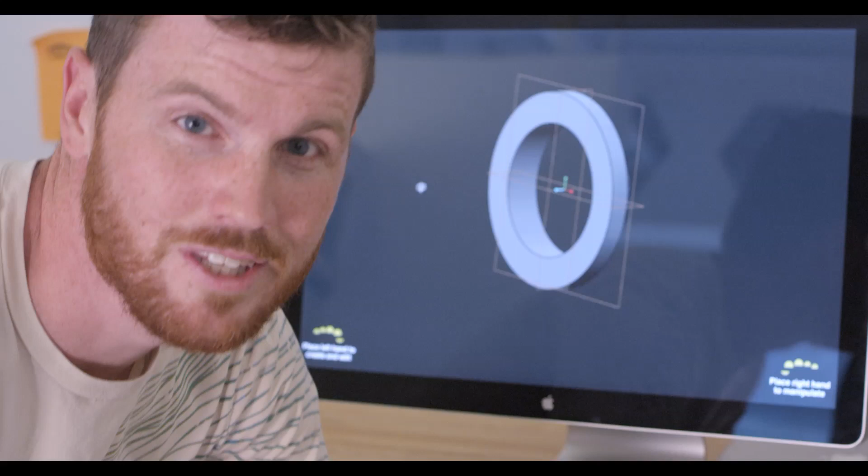We have a problem. As I see it, the creative tools I use every day are antiquated. They were designed 10 years ago and nothing's really changed. But unless you haven't noticed, the world has changed. We have crazy things called touchscreens. We have voice input. We have in-air gesture. And the one that I'm most excited about right now is the Leap.

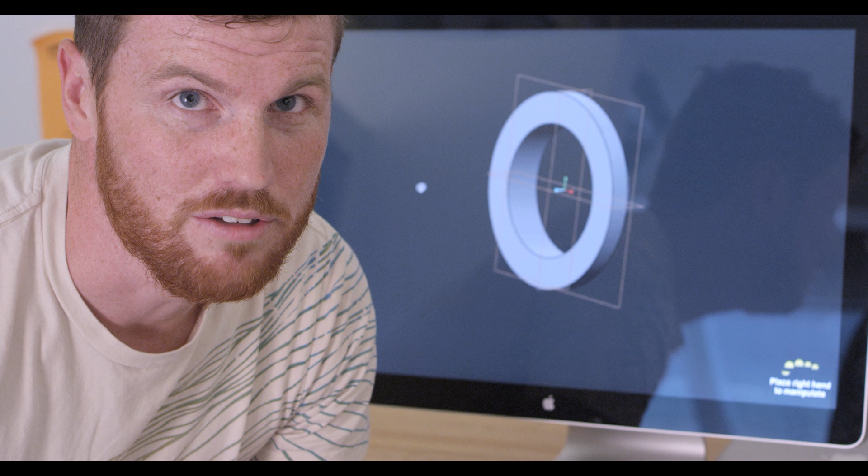So I'm going to walk you through what we call a Wizard of Oz prototype. And this is a prototype. It's not real working code yet. It would be if we could get a Leap device, but we don't have one yet. Okay, so the first thing you'll notice here are these little menus to the left and right. Now these we call self-revealing gestures.

Here, if I put my hand in here, you'll notice it shows me that it can recognize my 5 fingers actually, and it tells me what each of my fingers are for. And then I put my hand out, it tells me, oh, you should put your hand back in. Alright, so I do, and you'll notice it can recognize even my thumb down here. The Leap is awesome at that type of interaction.

So now it's prompting me to connect these 2 fingers together. So if I do that, tell me the next thing. Ask me what I'd like to create. If this wasn't the Wizard of Oz prototype, I wouldn't be talking right now. I'd be telling it what to do. If I wait a little longer, it'll teach me about what the system can do. So I want to learn about extrusions. Make a chamfer.

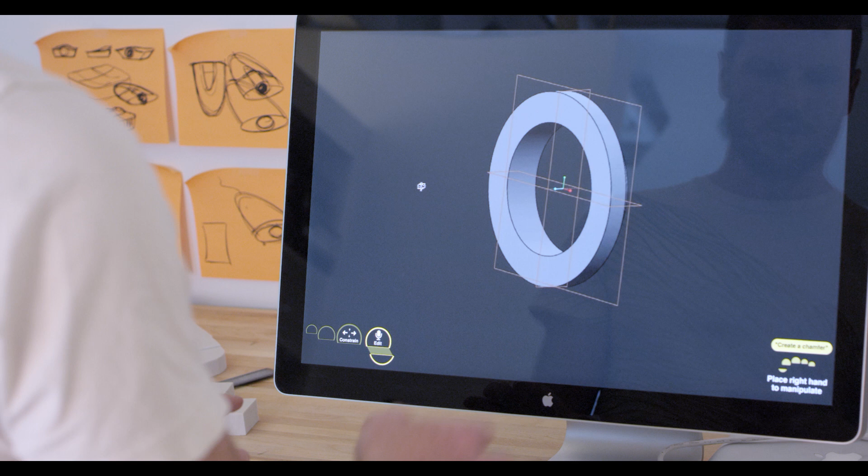So the novice user will just kind of read the menus. The expert user will learn what they're supposed to say and do and just do it. Their muscle memory and their vocal memory will kick in. So now you'll notice my create a chamfer, which is like a beveled edge, went over to my right hand. So if I put my right hand in, it'll say select the edge you want to chamfer.

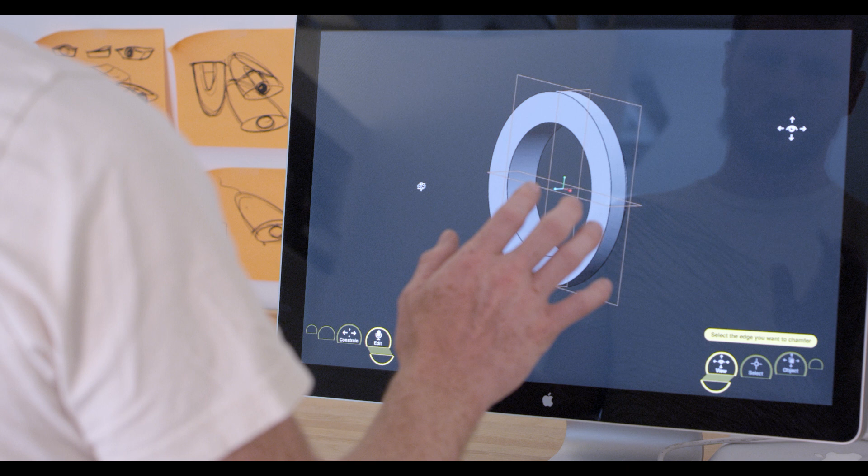And here you'll notice on the screen maybe that they put a cursor up there. So that cursor is mapped to arm movement. So my whole hand's movement will affect the cursor. And if I pinch my first finger together, I can activate view. I can move it around, see the 3D model, and my first finger is view because you do that all the time in these 3D modeling programs. You want to see the view, move it around.

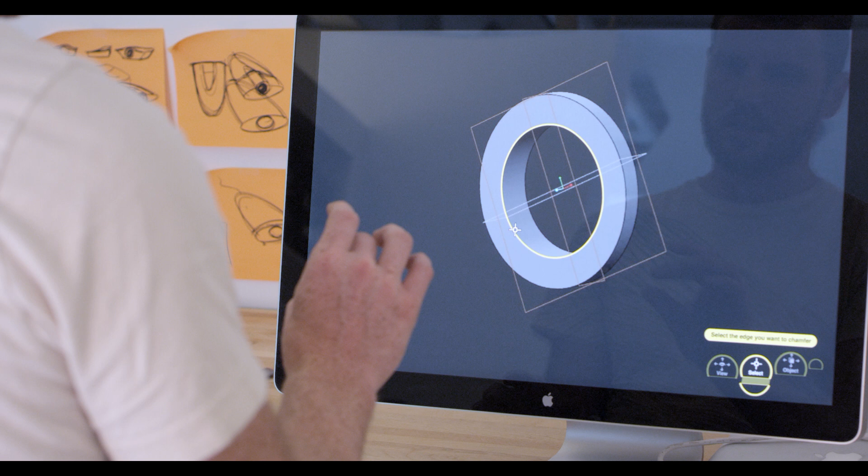Second finger is select. So I can move my arm and I can touch my second finger to my thumb. When I see what I want to select, there it is, that's the edge. So now I've made a chamfer. Awesome. And now it's saying edit the amount of chamfer. So here I'm going to zoom in by just pinching the model and bringing it towards me with my first finger. And now with my second finger, I'm going to adjust the amount of chamfer.

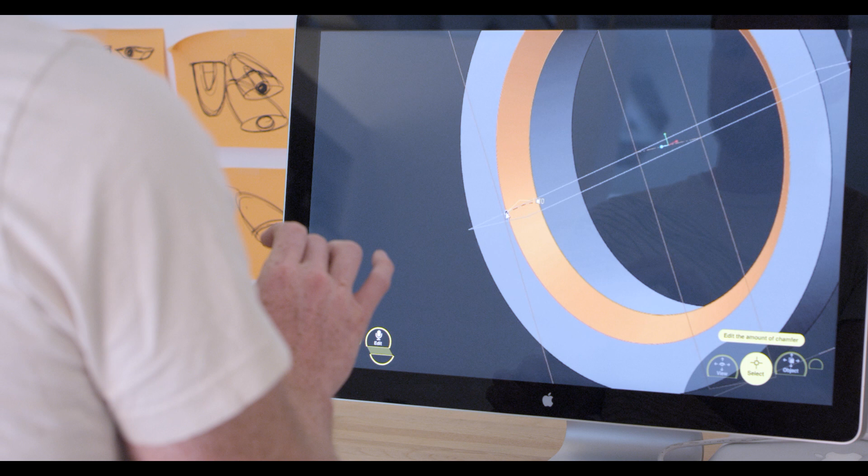That looks good. I'm sure Marcus would be proud. We're making a projector, Pico projector. You can see over here on the wall. And this is just one part of it. This is just the lens. So I want to see the rest of the projector. And so to do that, I can use voice command to select from a number of different objects. So view projector.

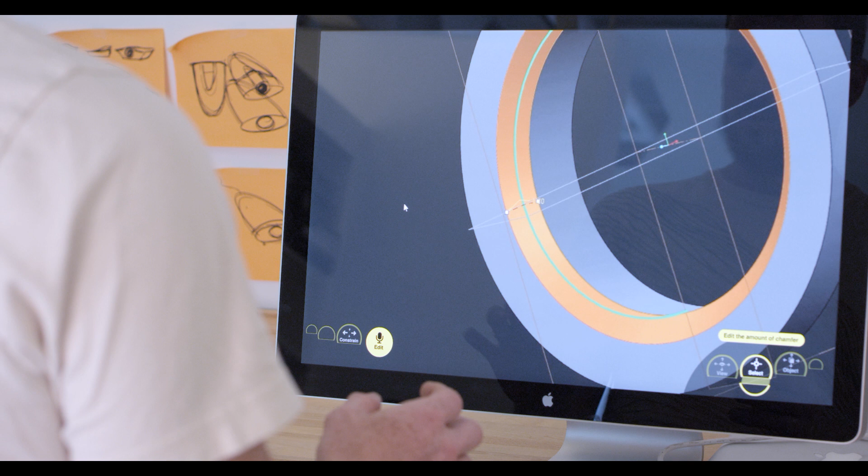And so now I can see the whole object, or all of my parts put together. And so let's see what that looks like. I'll go back to view and let's see. Yeah. So the awesome thing about the Leap is you get a full 6 degrees of freedom just in one hand. So that's translation left and right, forward, back, up, down, and rotation around all those same axes. And so that's what Leap is amazing at.

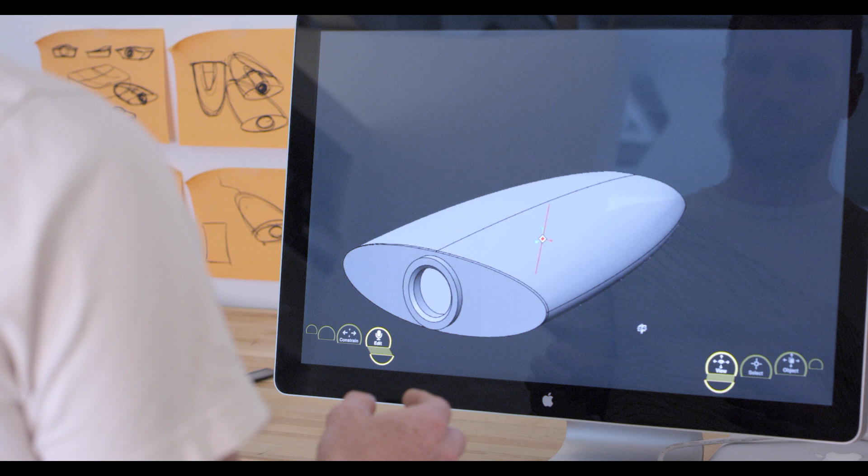And the thing that voice is good at is accessing tons of random information. So I hold down my voice button, view lens. So now I've gone back to view my lens because I want to keep editing that. Create offset. So I'm selecting offset from the origin, that looks about right. Create circle.

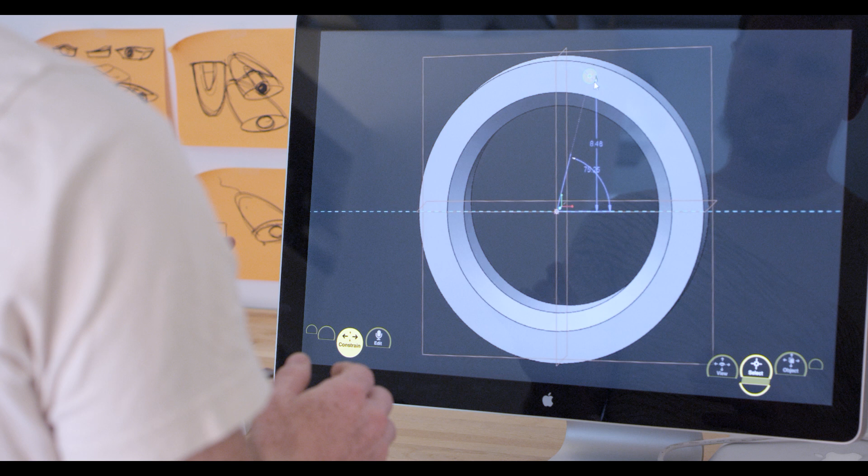Now I'm going to go up and create my circle. It doesn't have to be perfect. I can manipulate it later. Okay, now I want to get to a front view. So I'm going to hold down this finger. This is like my shift button. And it'll constrain any manipulations that I make. So adjust the view. Now I get a front view. If I want a different direction, I'd get a side view or a top view.

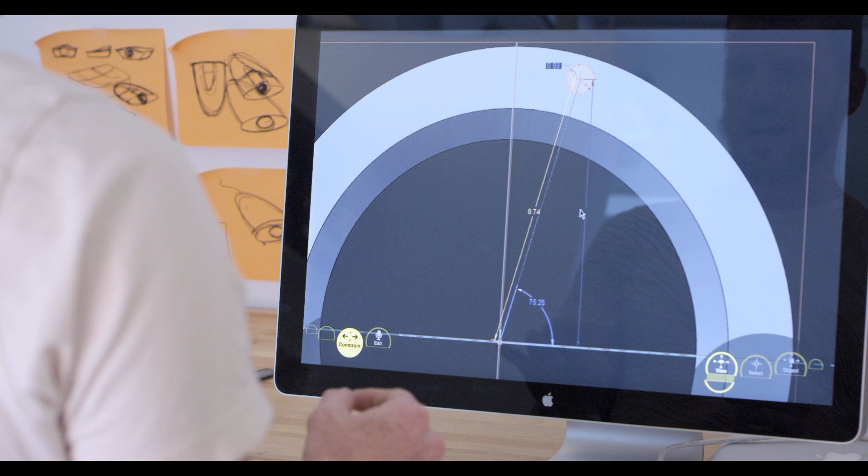And now I'm going to zoom in a little bit. That's good. I can see my model a little closer. And I know the radius on this circle is 9.5. So make radius 9.5 millimeters, like I said. And so now it's nice and lined up. And I'll extrude current object.

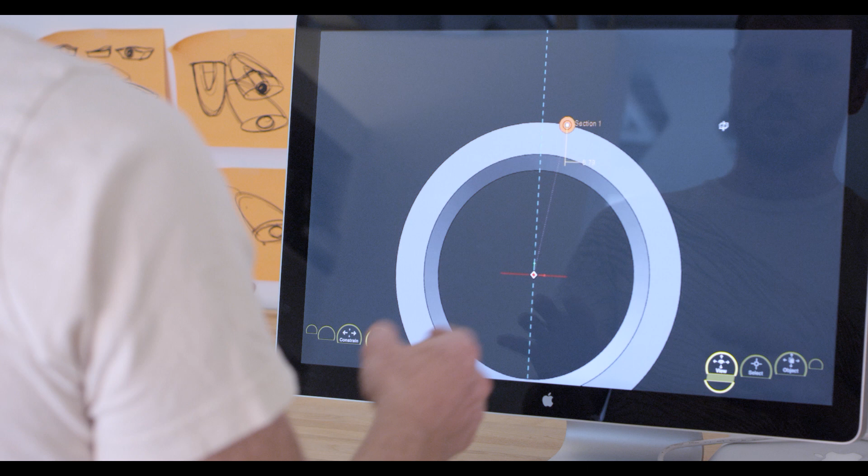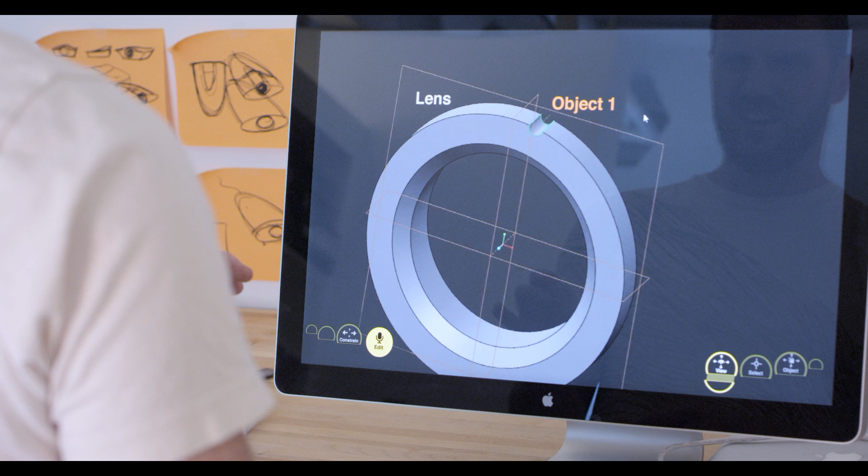And it extrudes it. Let's make sure it extruded the right way. Oh no, it extruded the wrong way, so we'll go in, flip it around. Perfect. Now I'll remove object 1 from lens. Great. So now I've got my extruded object removed from there. Make pattern from object 1. Perfect. I'm going to use this angle to make a pattern. So I'm going to go over and select the parameter I want.

And now we've duplicated this. Pretty sweet. Let's see what that looks like. Very nice.